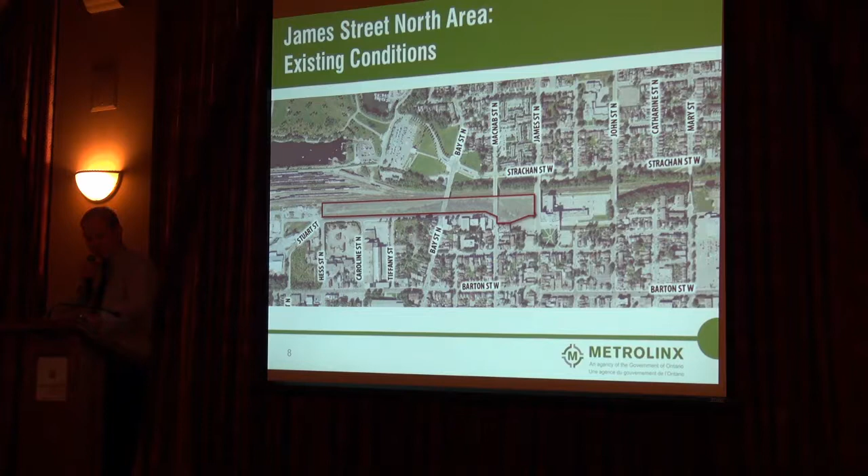So the site location is basically spanning between James Street and Bay Street and beyond all the way to Hess Street. It crosses underneath the James Street Bridge, the MacNab Street Bridge, and the Bay Street Bridge. And it's north of Stuart Street and south of Strachan, which is basically the CN corridor as we know it today.

The local communities, as you all know, are James Street North, the Beasley community, Strathcona, Central, and Durant.

And then we have the James Street North historic main and retail corridor, which is key to the station as well. So there's a few pictures here.

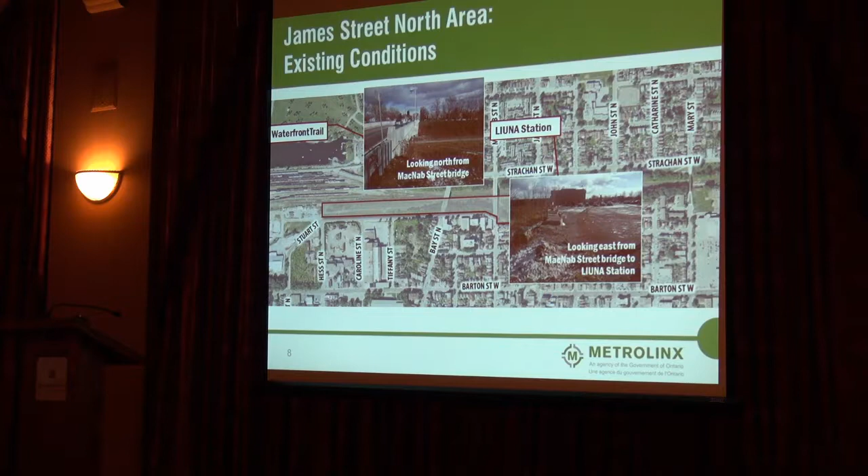So here we have the existing pedestrian accesses to the station. And you can see there's a number of key points, in blue here, all the pedestrian accesses identified.

The community pedestrian access route in the preliminary design report for the James Street North Station, which is prepared by our consultant IBI, identified the station as located within the historic urban core of Hamilton, and as a result, it has a dense network of pedestrian pathways to the station.

James Street North will likely serve as the main pedestrian route to the station, which is right here. Another key route is MacNab, as it crosses over the rail corridor, as well as Bay Street, and it connects to the Waterfront Trail. Overall, the analysis of these pedestrian routes is going to be key in designing the James Street North Station.

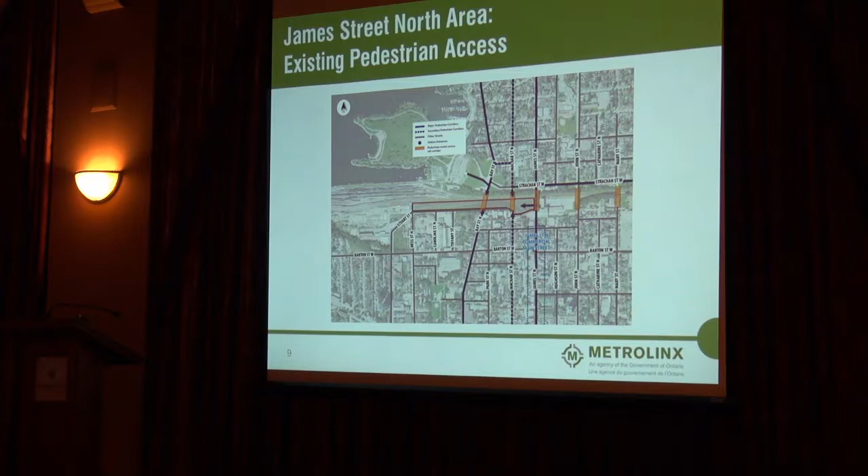As well as the pedestrian routes, we have the bicycle routes. There's a number of bicycle routes that we've identified as existing. I don't know if all of you can see it from where you are, but the solid red line on this map basically identifies the existing bike lanes throughout the downtown core and area.

The signed bike routes are identified in solid orange. It's a little hard to tell from where you are. And then the green is the Waterfront Trail. Anything in a hash line or a dotted line identifies future cycling routes that are in the city's master plan.

So all of these routes, now and in the future, are tying into how we design the station as well.

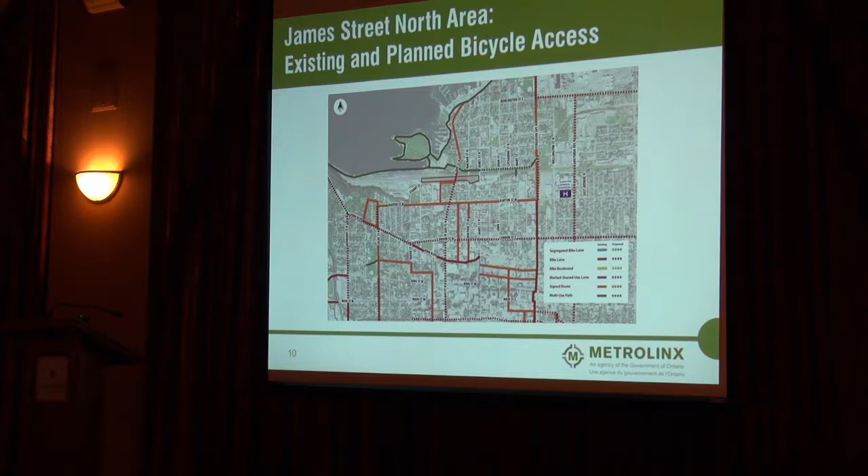And then we have local transit. Now, Alana identified before the A-line route. We also have Route 4, which is the Burlington route, and it comes along MacNab Street by the station. It has a 7-minute peak period service.

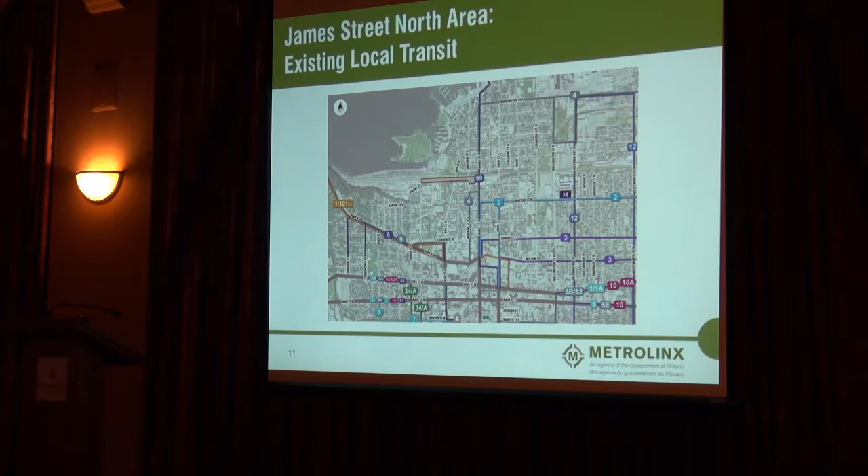You have Route 2, which is on Barton Street, and it passes just south of the station. It's a walkable distance to the station, also a 7-minute peak. And then again, the future A-line expansion. So those again are tied into the design of the station.

So now we get into the proposed site plan. So what about car traffic? We'll get to that. That's coming up.

So this is the proposed site plan at the plaza level. And you'll see what I mean by plaza level as we go through the presentation.

So we'll just identify here: James Street North, the MacNab Street Bridge, and the Bay Street Bridge. There are the GO platforms, you can see how they start just east of MacNab and span almost to Tiffany Street. They're over 300 meters long.

We have a station building located between MacNab and James Street, and here's a plaza that fronts James Street and brings you to the station building near MacNab. There's also an elevator and stair to the platform at MacNab, between MacNab and James, and some bus bays in that same area.

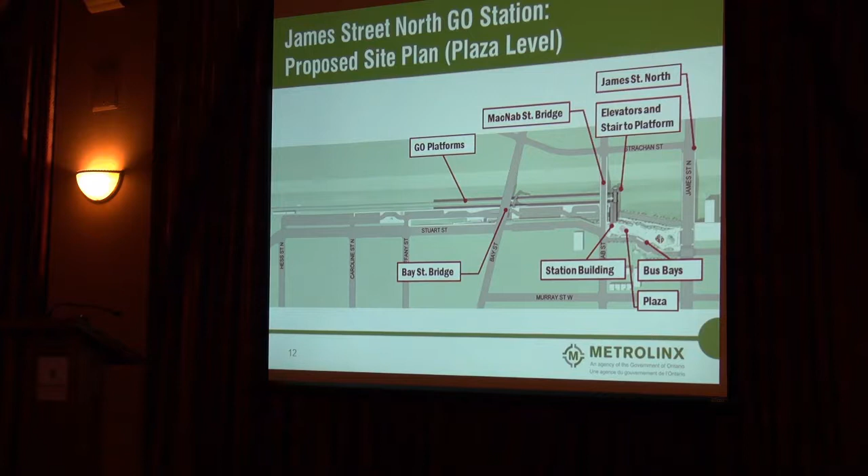Kiss and ride locations: we've identified one underneath the MacNab Street Bridge that you would access down from James on a parking deck, and a second kiss and ride off of Tiffany Street.

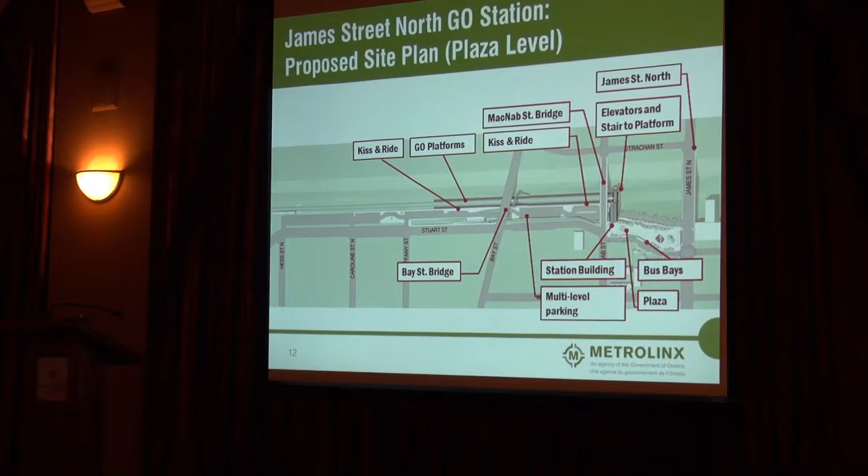And there's our multi-level parking, which I just talked about, and some surface parking beyond. This goes to the proposed vehicle circulation to the station, which basically identifies how vehicles will access the station from the greater community.

Key to that is ensuring that access to the station is in keeping with the North End Traffic Management Study, conducted by the city. Emphasis is placed on ensuring traffic comes in off of James Street, rather than external streets like MacNab and Bay Street coming through the North End community.

The way the kiss and ride is enabled, it allows traffic to come in off of James Street itself. There's currently a traffic study report being conducted by our consultant, which will review all of the design and ensure it's in keeping with the North End Traffic Management Study.

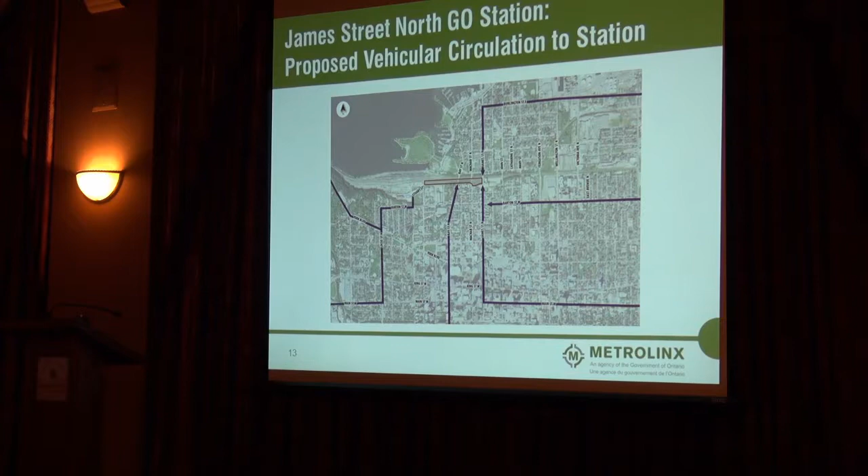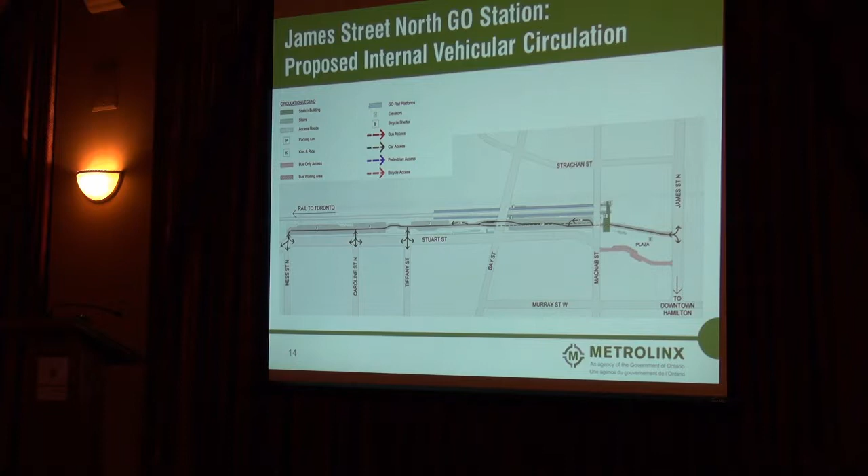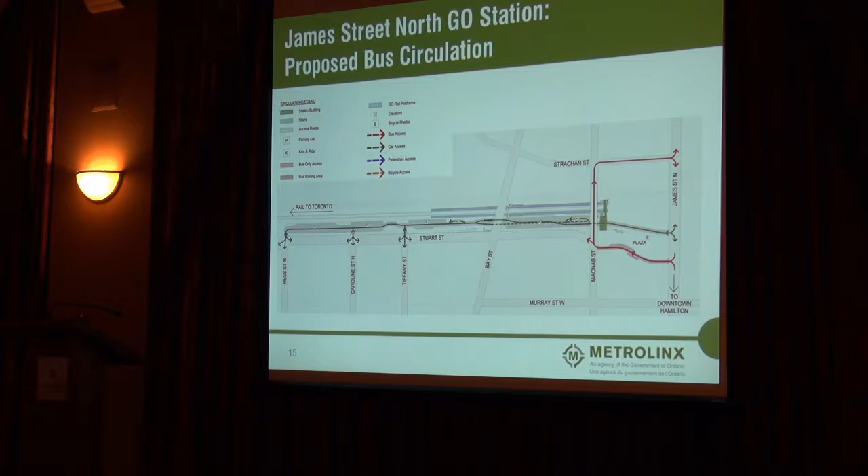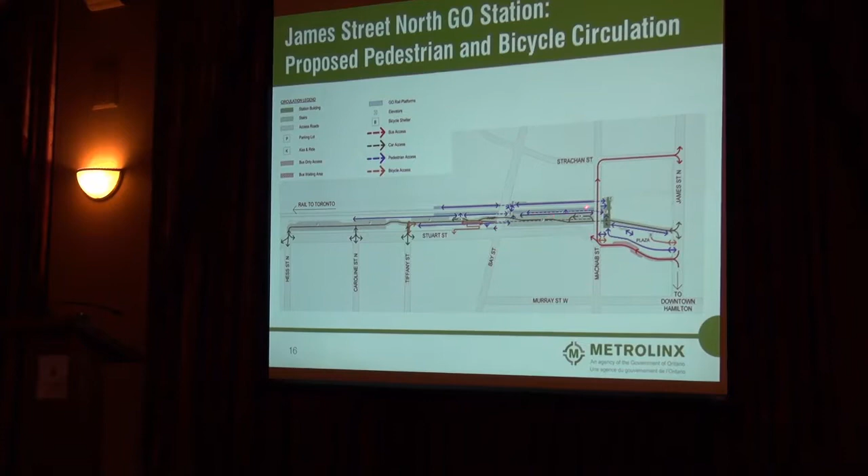We're going to provide direct access off of MacNab to that pedestrian bridge. So once you're on the MacNab Street Bridge, you can cross into the pedestrian bridge and down to the platforms, along Stuart, and then you have the parking deck. You can walk this way, and we'll provide a second pedestrian bridge at Bay Street, with another access off of Bay Street down to the platforms, with elevators at that location as well.

And then once you get down to Stuart, you're at grade and can access in and around. This is key to the waterfront trail access, as it's off Bay Street.

So down here is where the parking deck is. It's about half of it is parking deck. The lower level is parking deck as well. There's parking here, here, and here.

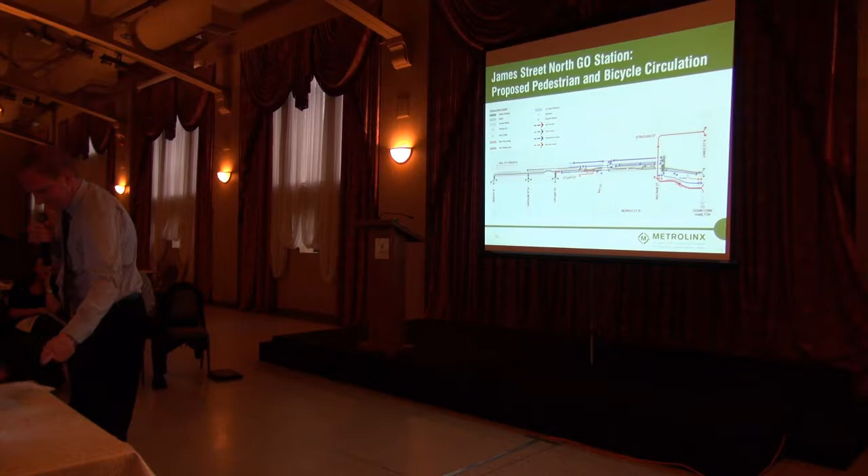How many cars? I didn't mention how many cars. We're proposing 200 to 300 cars, as well as 4 bus spaces.

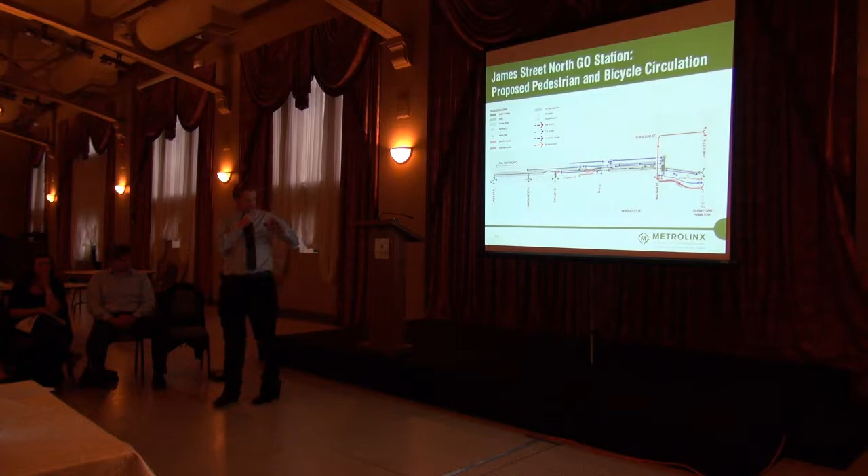So that essentially describes the station itself and the circulation through the station. I'll turn it over to the next part.

Will there be fees in parking? Because in the north end, we're having a lot of problem with parking.

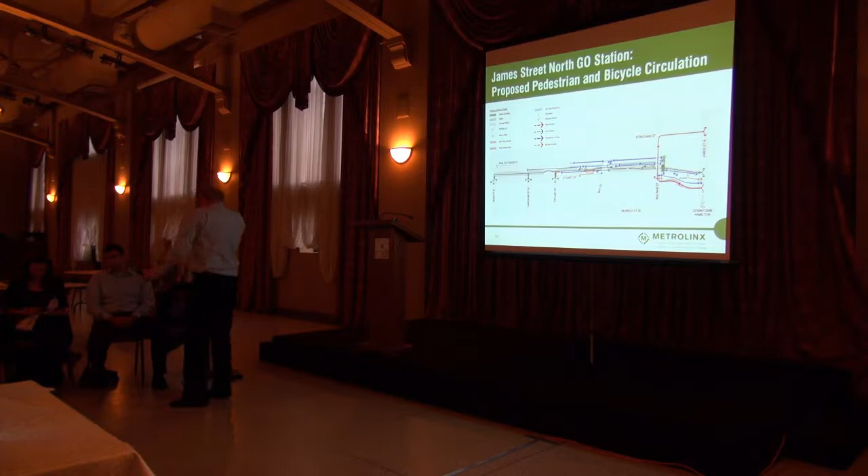No, not at this point. Maybe we can hold all the questions till the end, because some of them might be covered by what I'm going to present.

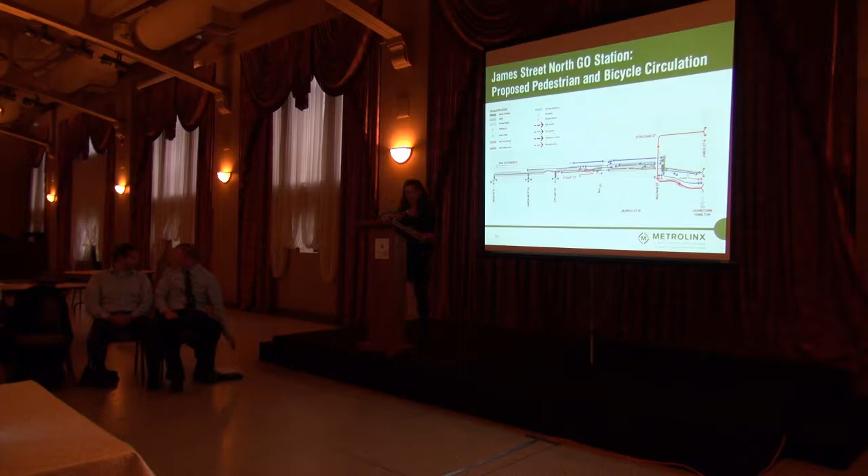I just want to point out, you probably are wondering why the platforms are so far away from James Street. It's not ideal, of course, but that's because of some limitations due to the space available because of the bridge at James Street. Because of our technical requirements, we have to move it that far back. And that ended up meaning we located the building there, but it also gives us this great opportunity to create this plaza off James Street.

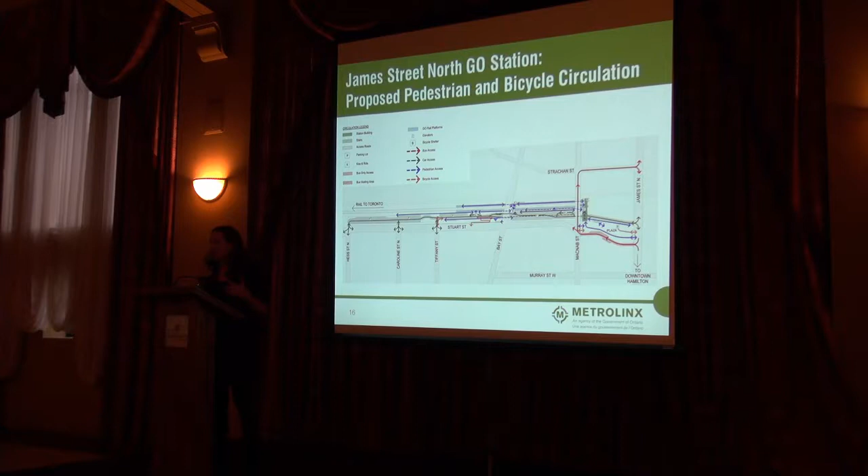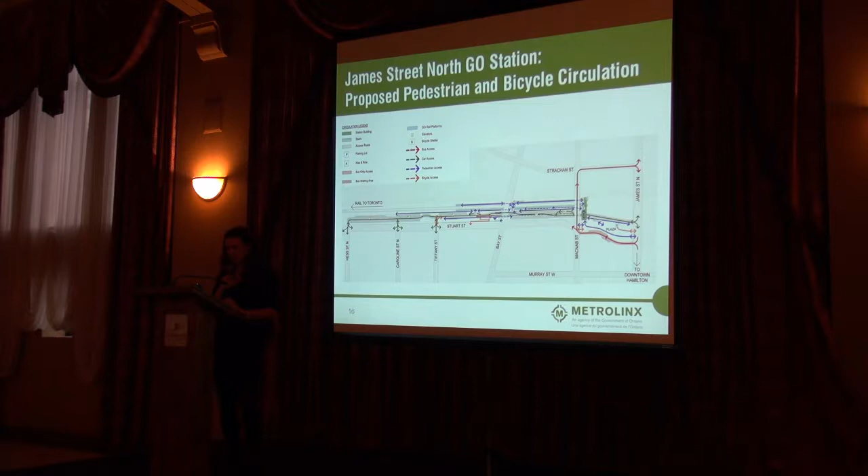So as key stakeholders in the community, you can help with the functionality of the station and the plaza. We have to really move quickly in terms of the station layout and design, but there's opportunities within that for your input. So on the drawing, we've identified parts of this station layout.

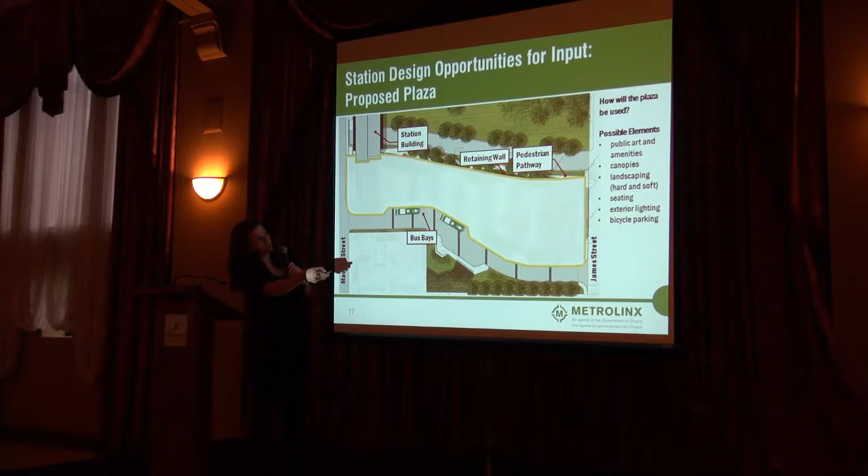Sorry, I'm just going to move that forward. That are fixed. So the location and the general configuration of the station building are fixed. The retaining wall, basically on the north side of the site, where Randall pointed out. So this retaining wall, as well as the bus lane and GO bus bays, so this right here, and the pedestrian pathway down to the platform level at James.

So we definitely want to have something in there. But this plaza, basically outlined in yellow, has not been fully designed yet. If you see, there's some faint design behind here, but we covered it up because really it's still very much a work in progress.

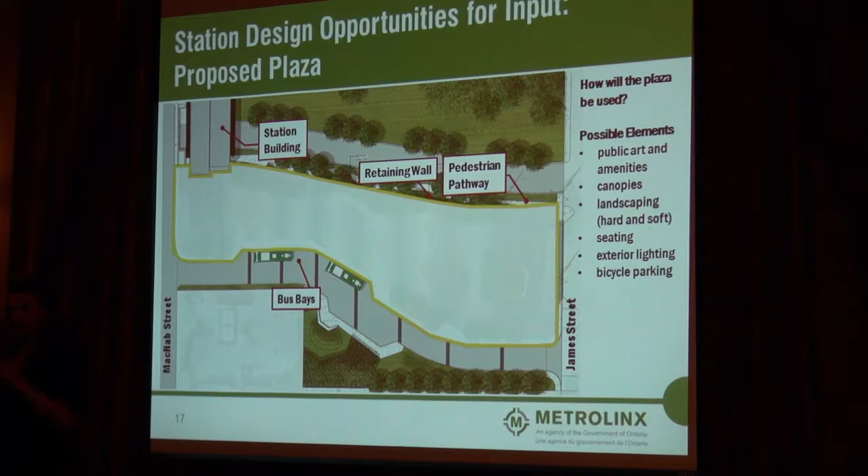So we really want to get your ideas. We know that this plaza is going to serve a primary function of providing access to the station by foot, bicycle, or bus. But there's other uses that can also be accommodated there to make this really a vibrant urban space. Ultimately, the design of the plaza will be determined by these proposed uses, because once you get past the basic function of getting access to the station, then we can really play around.

So some of the other things that could potentially be included in the plaza include public art and amenities, canopies to provide shelter and frame the plaza, hardscaping, paving, retaining walls, softscaping such as lawns or planting beds, trees, seating, lighting, bicycle parking. So that's basically it for the plaza.

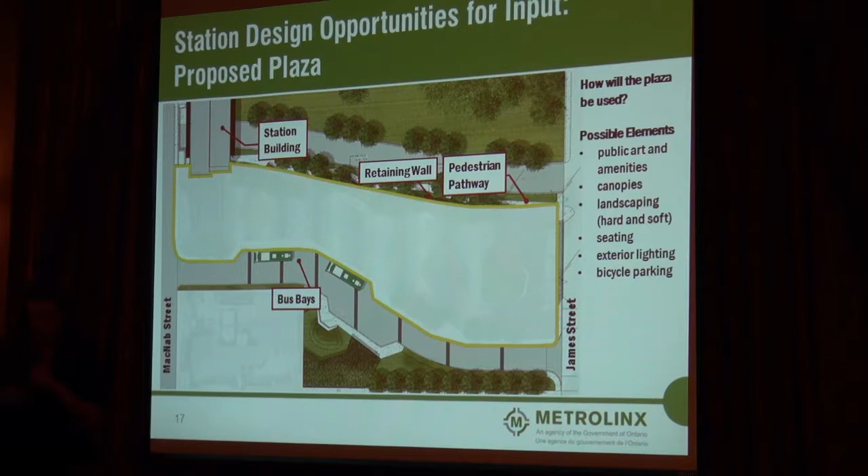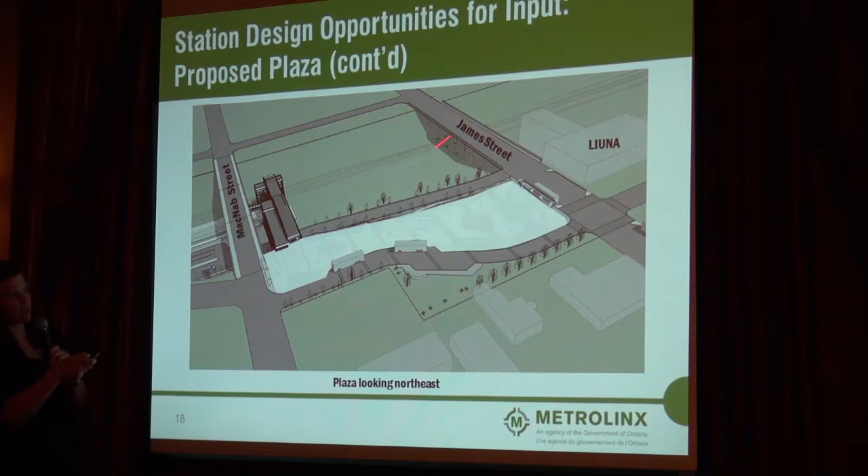I'm just going to go to the next slide to give you a kind of bird's eye view. So here's the LIUNA Station, and so we're looking northeast.

So it's important to note that these are just examples. It's not a reflection of what we can necessarily provide, but we do want to hear from you and provide you with a plaza that works. We just have to keep in mind that it's a balance with our very constrained timelines and costs. For example, with public art, we're willing to work with the city and partner with them to explore opportunities for a local artist or artists to incorporate art into the project that reflects the local community. We've actually already started preliminary discussions with the city on that and continuing that.

Likewise, we're also willing to work with the city to install infrastructure to support community programming, for example, providing electrical outlets in the plaza, things like that. But the programming itself will have to be up to the city.

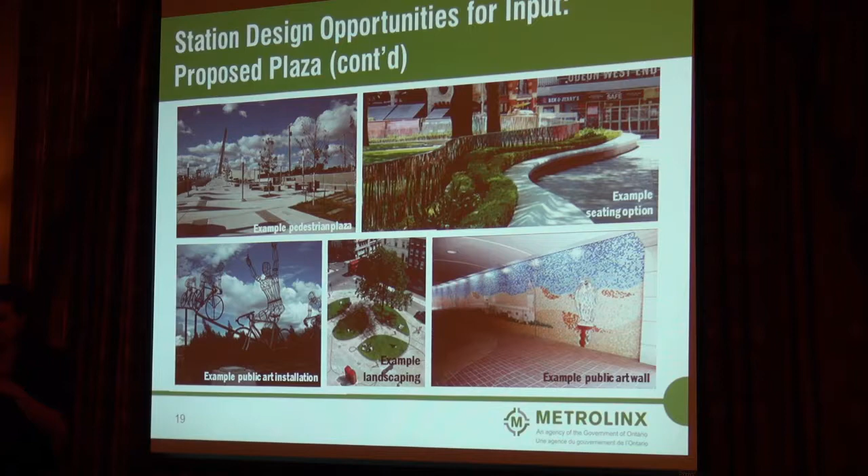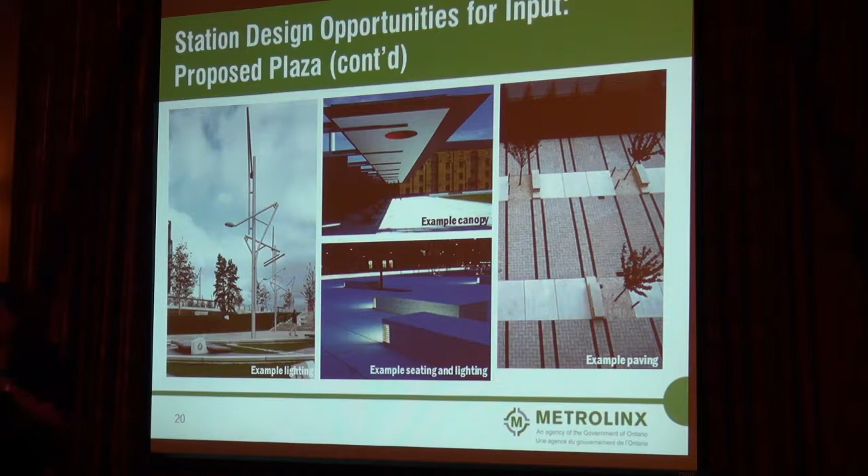So this is just some more examples. On the left are some light masts that have a sculptural quality, and next to that is an example of lighting integrated right into seating. Above that is a canopy, and on the right is just a paving precedent. So it's just to get your ideas going.

So, like I said, we're moving very quickly with setting the location and general configuration of the station building. Essentially, the station building is a bridge structure that runs parallel to the MacNab Street Bridge and connects to the two platforms by stair and elevator towers, and also connects directly to the MacNab Street Bridge.

So to date, the direction we've been giving our consultants is to make the building as transparent as possible, to allow for views in and out of it, particularly at night, and to really help animate the plaza. This image represents the consultant's current proposal for architectural expression of the building, interpreting the comments we've provided so far. But there's still a little bit of room where we'd like your input, because it's still in preliminary design.

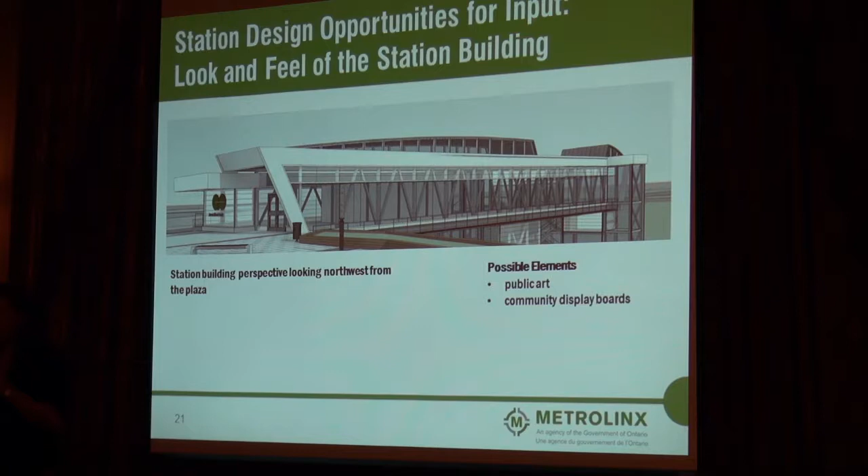Your general thoughts about the character of the station building. Are there opportunities for public art integrated into the station building? Are there other elements we need to consider, maybe a community display board, things like that? Now is the time to hear about them.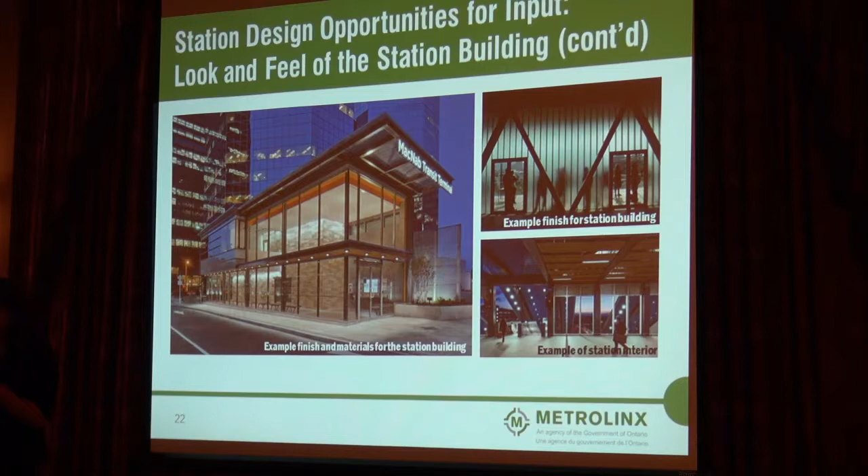And these are just some examples of ideas we've already given them. Transparency is one direction we feel is important. You'll probably recognize the MacNab Transit Terminal here on the left, which uses transparent glass, masonry, wood, and steel. The image on the top right illustrates the use of translucent building material, allowing light and partial views into the building. The bottom right shows an example of a station interior.

So this is just a final perspective looking northwest along the length of the station, showing the current concept for the entire station area when complete. We're standing basically right across the street from LIUNA, hovering above the ground, looking west across.

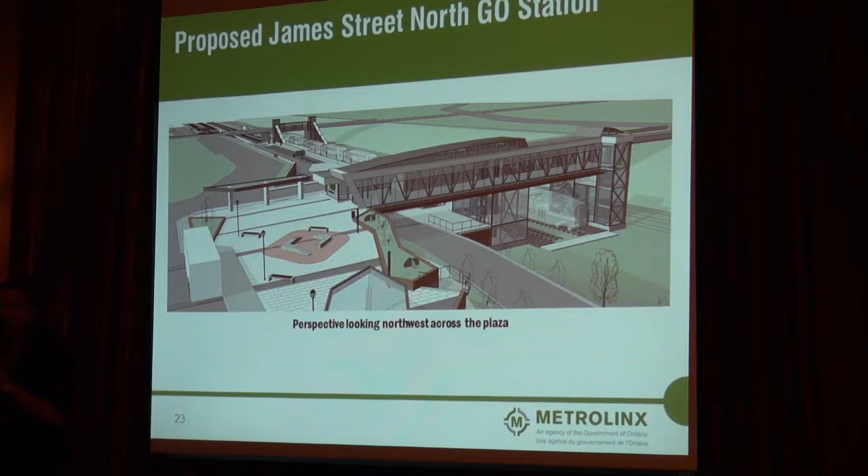So, like I said, we're in the preliminary design phase for the James Street North Station. Following tonight's meeting, we're going to add this input to what we heard from the comments already received from April 30th, to help identify a series of station improvements, particularly focused on the plaza. We're going to continue to collaborate with the City of Hamilton and engage community members. In the fall of this year, we're planning to host a follow-up meeting with key stakeholders to show how the feedback received from these meetings is used in the design.

Construction is scheduled to begin in early 2014 and will include constructing a new station building, fully accessible north and south rail platforms, a kiss and ride, the parking facility, the bus loops, and pedestrian and bicycle pathways. And as Randall mentioned, there are also plans to use the 2 rail tracks for interim layover purposes.

Just so you know, the plaza probably will not be constructed by that time. We will do our best. But the good thing about that is it gives us more time to design it and get your input into it. The station will be operational by summer 2015, in time for the Pan Am and Parapan Am Games. Following those games, we'll continue construction on the Bay Street Bridge and provide a connection to Bay Street for more convenient customer access to the train platform. So total station completion is scheduled for late 2016, early 2017.

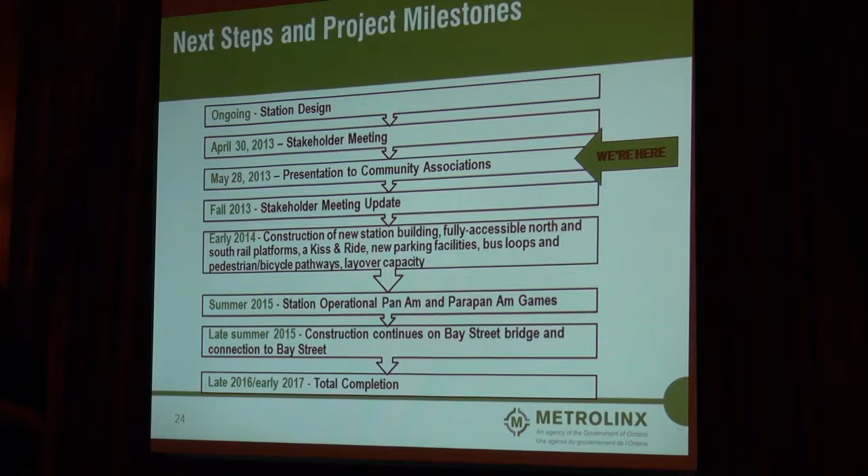So that's it, and thank you very much for coming. This turnout is incredible, and we're really happy to see all of you so interested.

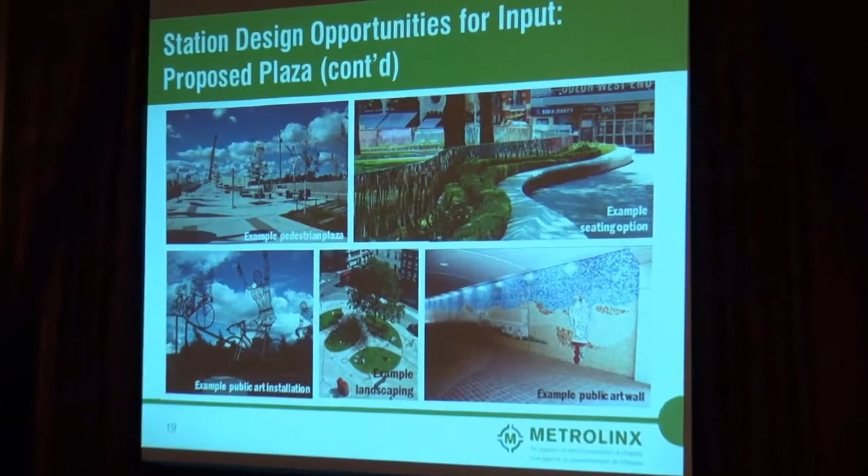So the multi-level parking essentially wasn't an effort to get more parking. What it came out of, it wasn't even in our vision, but because the corridor is so deep, it's 8 meters deep, and that's extremely deep. We don't have that anywhere else. We used the deck to break up that distance. If we were going to put a kiss and ride down at the lower level, you'd have to climb that 8 meters to get over the corridor and then go back down. What the multi-level deck did was allow that kiss and ride to be about 4 meters below and get you back up and over the corridor after you got dropped off.

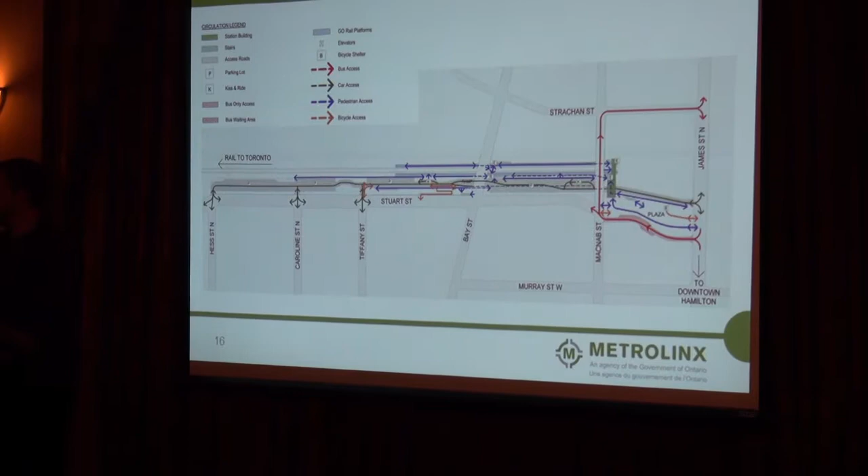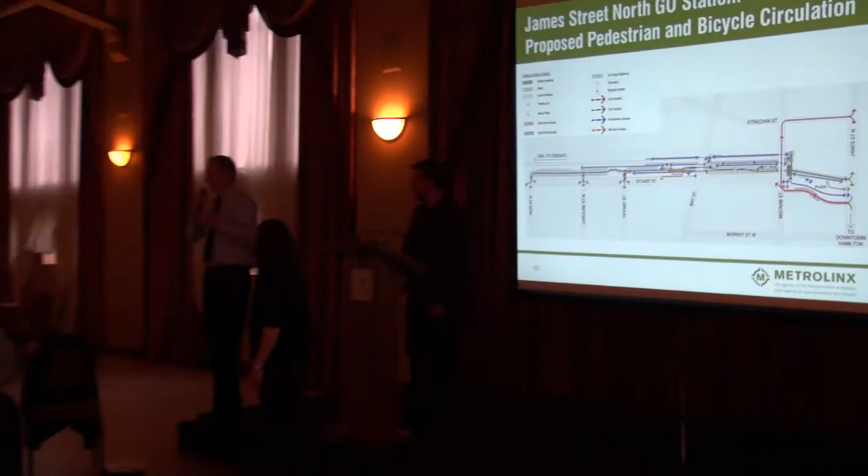It's quicker, it splits the site in two, it breaks up that huge distance. Speaking to the aesthetics of it, we're working with the design consultant to make it aesthetically pleasing. One of the benefits of it as well is that without the parking deck, what you end up with is basically an 8-meter retaining wall that breaks up the corridor. So if you were looking south from the north end neighborhood, you would just see a concrete retaining wall that went 8 meters down. What the deck does is break that element up and just improve sight lines in general.

I'll add to that also—the retaining wall, if we're going to spend the enormous amount of money to build this giant retaining wall, let's use this space wisely, especially because it's really out of sight from the neighborhood. So it's a great place to tuck in some more parking and give some more activity and oversight to the platforms itself, and keep the parking close to the platform.

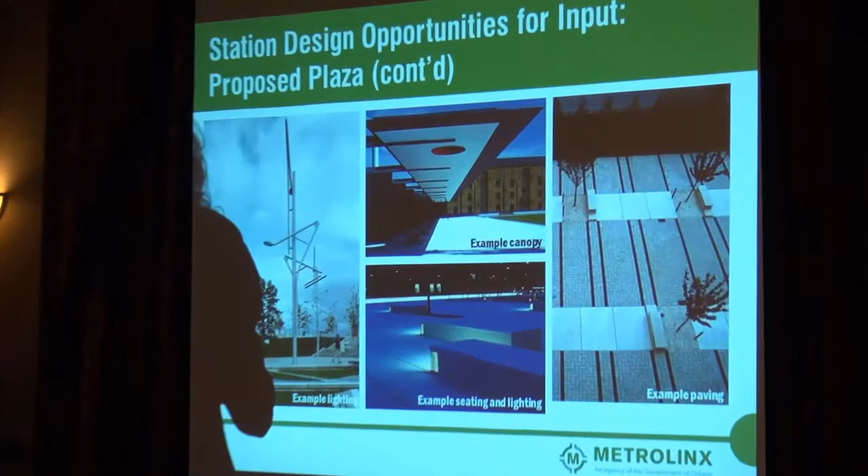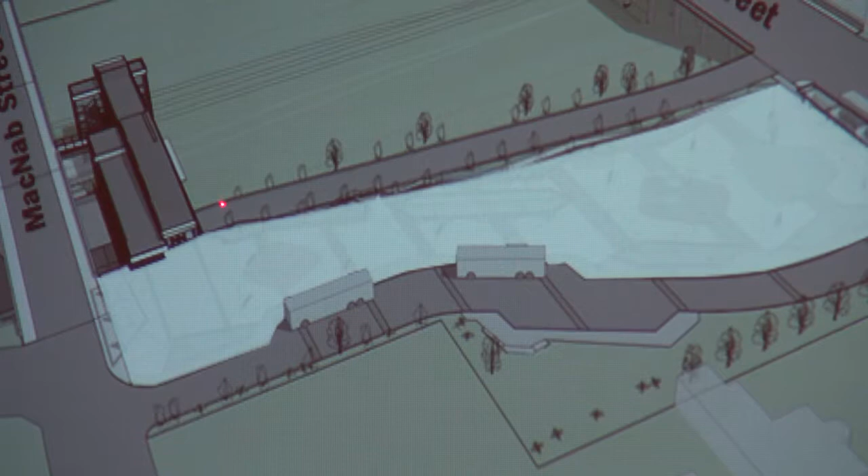I'm going to bring the image up on the last slide because that's probably the easiest to see. Can you see from there? So basically, when you look across the street right now, there's the kind of plateau of that empty lot, which is this plaza now. And then we're going to have a ramp coming down off James, going all the way down to about 4 meters below the existing street level. That's going to be the top level of the parking structure. So what I'm pointing to right here is the kiss and ride, and that's 4 meters below street level.

And then 4 meters below that will be another level of parking. But that two-tier structure only lasts between McNabb and Bay, is that correct? Yep. So here we're coming down that ramp, you're on the 4 meters below - this is McNabb, this is Bay, so it doesn't even reach all the way to Bay, I think.

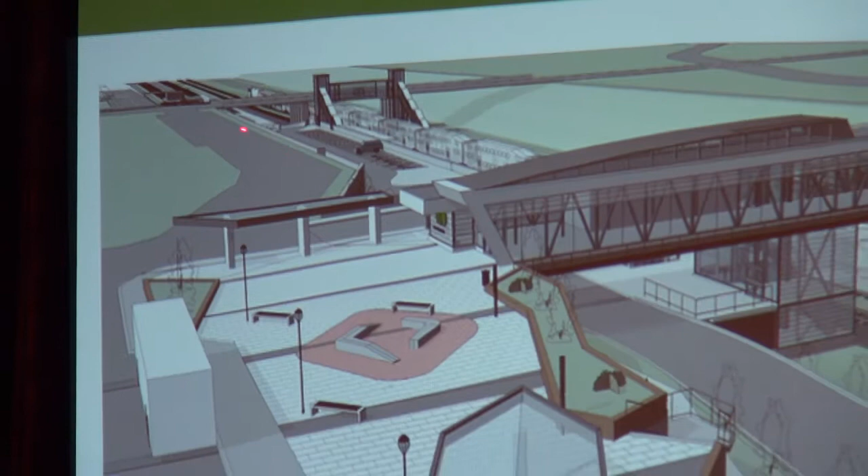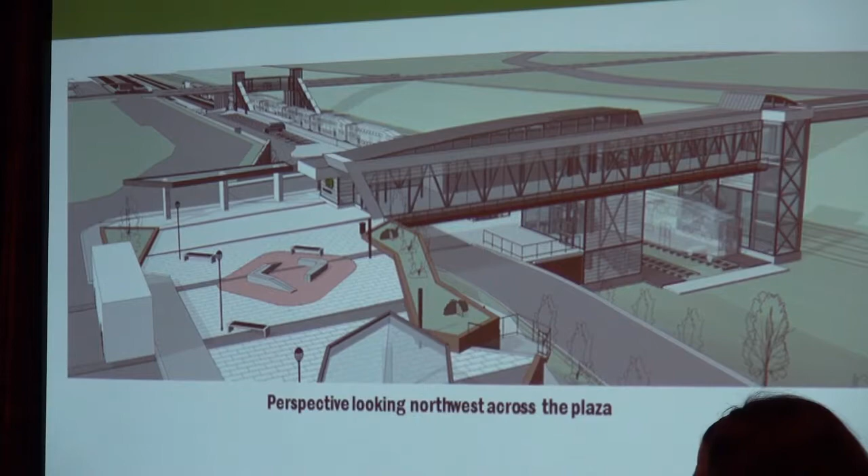And then there's a ramp down under there, where you can go either underneath this ramp, or then it becomes just surface parking, approximately 8 meters below. But then the slope of the depth of the site becomes shallower, and eventually you meet street level again. So it's sort of, you've got a number of different planes coming together, basically on that lower level. Yeah, most of the parking will be invisible from the street level until you get farther down past Bay.

One of the strategies with Metrolinx for funding this big move was paid parking. So assuming that might come at some point in the future, how can the neighborhoods be sure that won't impact them the way it's happening with the hospital now, where parking is too pricey and people are moving into the neighborhood streets? Have you been looking at ways to circumvent that on the assumption there will be paid parking at some point?

We haven't at this point, but that's going to be an issue at all of our GO stations if we implement paid parking, so it's something we'll have to consider everywhere. The Hamilton LIUNA Mobility Hub falls within about 800 meters around the station, and our mobility guidelines call for paid parking in the entire mobility hub. So that might be something the City of Hamilton implements as well, because we want people to take transit, walk, and cycle in these areas, so it might not just be in isolation. That's another option too.

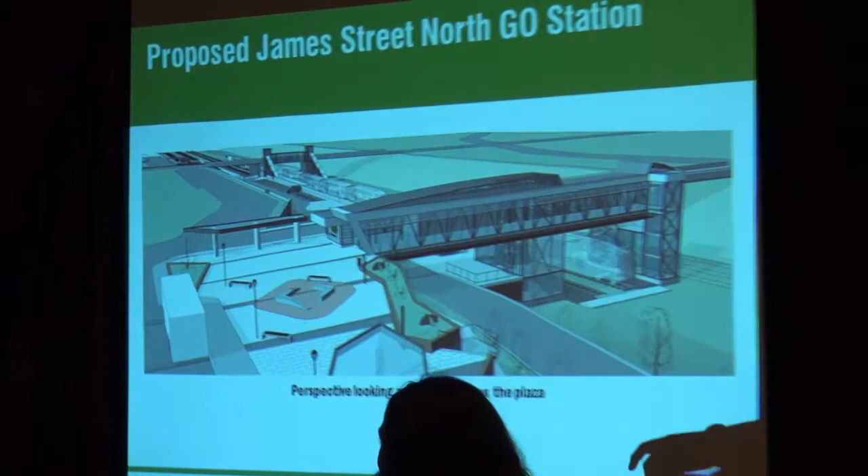In the back of that picture, there's a structure I can't identify. Is that a new bridge at Bay Street? Yes, that's a second structure at Bay Street. Has that already been designed? No. So why is it depicted that way? Well, it's been conceptually designed, but it hasn't gone to detailed design.

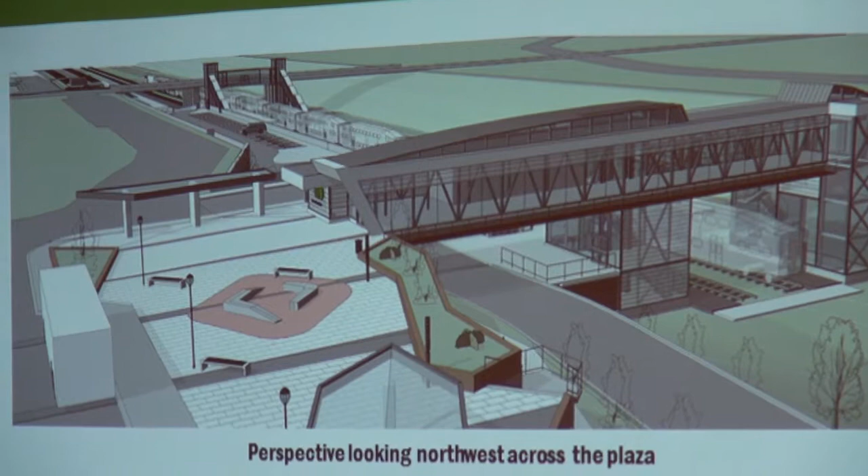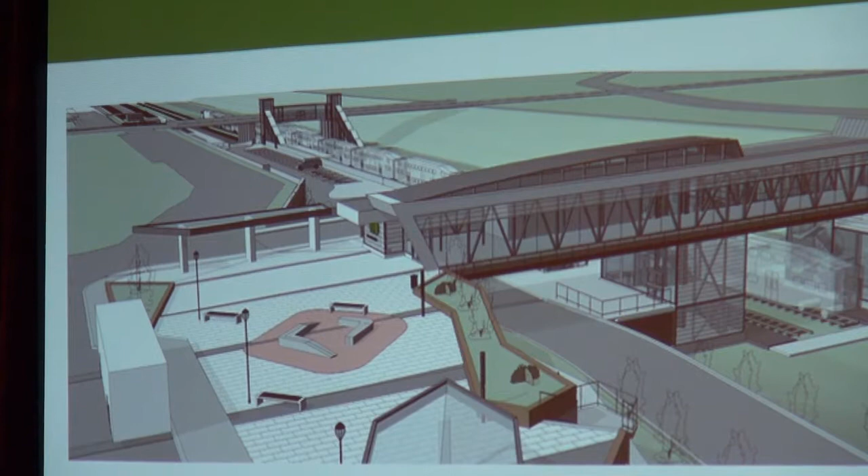Isn't that part of this project? Do you not have a slide that shows us that bridge? No, we don't. We literally have not put much thought into that yet because we're on such a tight timeline to get this open by 2015. We're trying to get the layout and placement of things set and focus on what needs to be constructed by 2015. We actually just met with our consultants this week and said, okay, we need to start thinking more about the Bay Street Bridge and how that's going to work. So right now they've shown something conceptually, but it hasn't actually been designed very much.

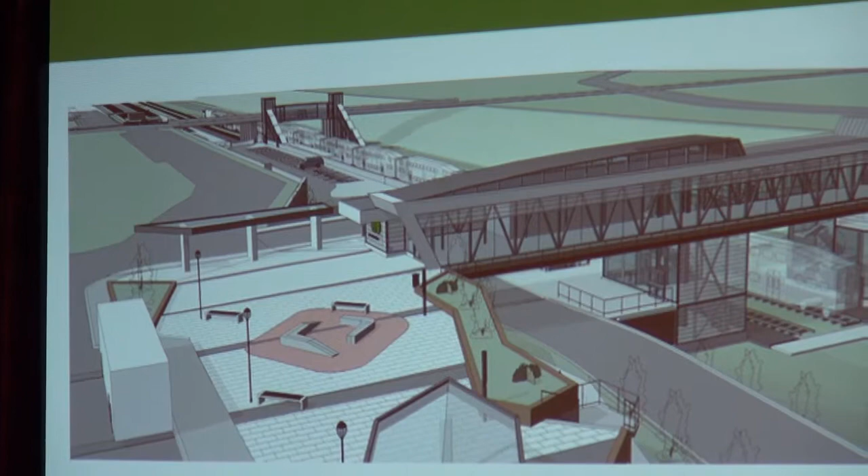That's going to be the most prominent structure in this whole deal. We would really like to have a look at that before you execute it. Well, I think when we come back in the fall it'll probably be much more designed at that point, so that's an opportunity. But it shouldn't be more prominent than the James Street North station, because that's actually the station building, while this is just stair towers and connection.

Will people have an opportunity to provide feedback about that in the forms you're collecting? Sure, yeah. Okay, so that's another option as well.

You can correct me if I'm wrong, but I was in contact with CN, and it's my understanding CN is replacing that bridge and designing it. From what I was told through their PR and engineering department, nothing special was going to be designed, it was pretty much replacing the bridge as it is. But I guess you're referring to the pedestrian towers or whatever. That's a good question. Yes, CN is replacing that bridge. We're working with CN.

They're replacing the road bridge. We'll be building a structure adjacent to it and potentially attaching to the Bay Street Bridge itself, which does not impact their design. We'd be designing it independently, so our structure will be independent of that.

I ask you why CN hasn't suggested using the factory land that Hamilton Works is on right now, which CN owns. The contract will be almost up by 2015 and should be moving on, so why aren't they offering that land? I don't know if that's a question Metrolinx can answer. It seems to me that's a way out onto Stewart Street.

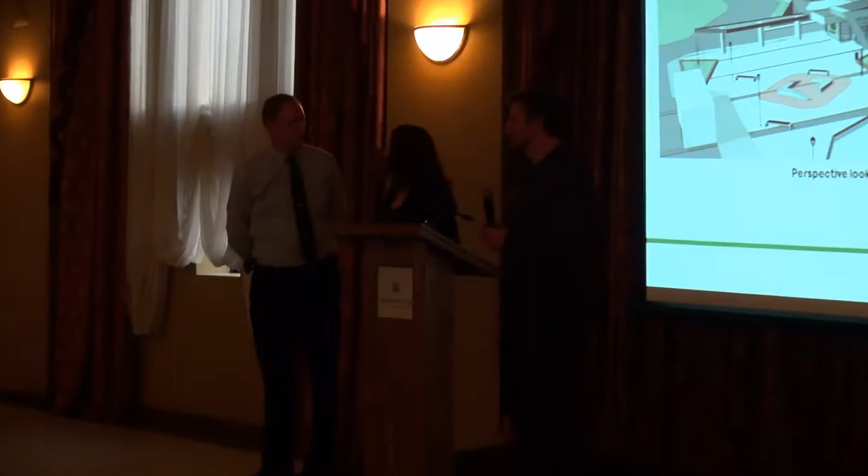Well, we didn't say they're not for Toronto. We haven't just, basically we're building in because we know that somehow there's going to be probably some buses there. They might be train meets, they might be in place of trains, but we haven't done the service plan.

I've looked at all the designs, or ideas, on the Metrolinx website, and of course you're going to be right across the street from one of our most beautiful and historical buildings. I know you can't create a little LIUNA Station, although I wouldn't mind if you did, but when I've looked at what's on the design, unless I've missed something, I'm not seeing any effort to acknowledge, harmonize, or echo it. I know you can't create something that looks like this, but there are ways, even with modern architecture, to try to blend, echo, harmonize, and what efforts are being made to do that?

The question is, what efforts are being made to blend or harmonize the architecture of the new station with, for example, the building we're in right now across the street?

I'm just going to say what I said earlier. Someone had pretty much the exact same comment, so we had a lot of these comments at the last stakeholder meeting. Some of the direction we're giving our consultants is to look at the materials of the LIUNA Station as one thing, and the kind of heritage of steel and stone, because I think that is a great way to tie into the local character.